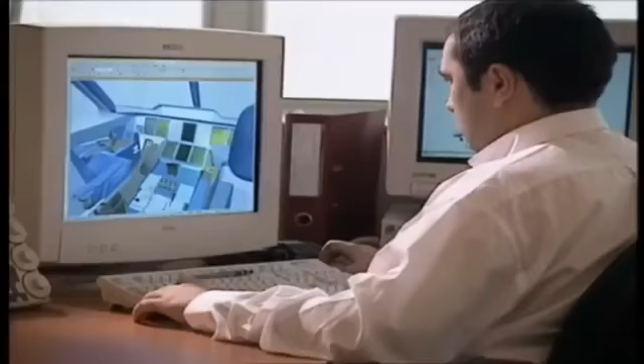It's a mega plane, bigger and heavier than any other passenger plane in the sky. It will hold more people than any commercial jet flying. Designers have spent billions. Now is the moment of truth. Will the world's biggest passenger airliner survive its maiden flight?

An early spring morning, clear skies and a light breeze over southwestern France. Crowding the fields that flank Toulouse International Airport, 40,000 spectators, backpackers, campers and journalists from around the world. All vying for the perfect spot to watch the maiden flight of the Airbus A380, the largest passenger plane ever built.

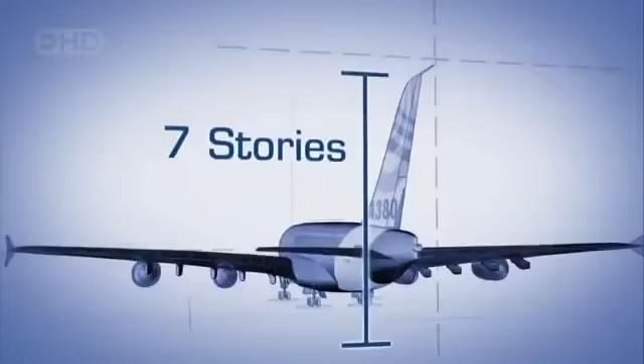It's 73 meters long, 7 stories tall at the tail, almost 80 meters from wingtip to wingtip, heavier, longer and taller than a 747, with 2 full levels of seating, enough to hold over 550 passengers.

Getting this monster off the drawing board required new, super lightweight materials, 4 powerful new mega-sized engines, massive new factories across Europe, and a computerized flight control system more sophisticated than any other in commercial aviation.

This moment is the biggest gamble that the company has ever taken. A $12 billion investment, the company's entire future, and the lives of future passengers all ride on the success of this historic test flight.

Alongside the runway, a hush settles over the crowd as the megaplane comes into view. Gradually, it gathers speed, accelerating to reach its takeoff velocity of 269 kilometers per hour. Then, as it nears the end of the runway, the moment of truth. The massive nose tilts skyward. A sliver of daylight appears beneath the rear wheels, and the Airbus A380 takes to the sky for the very first time. The engineers and technicians in the crowd breathe a collective sigh of relief. Their baby is flying.

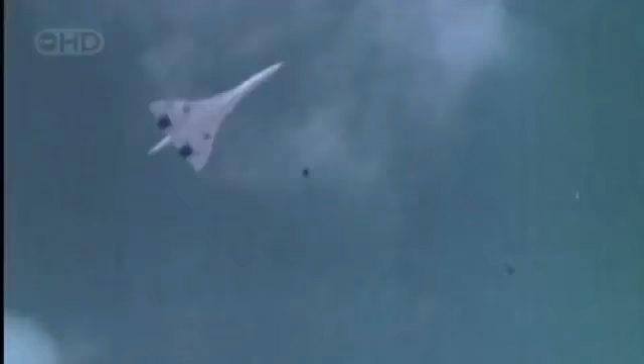The Concorde is here. That same year, Aerospatiale and British Aircraft Corporation, the precursor to Airbus, introduced the Concorde. While Boeing was bulking up, Europeans were getting small, but very fast. The Concorde traded capacity for speed. The plane carried only 128 passengers, but it could cruise at twice the speed of sound, cutting the trip from New York to London from almost 8 hours to just under 3.5. Both the 747 and the Concorde came to be the epitome of luxury in air travel.

These two differing visions came to symbolize a fierce rivalry between American and European aerospace giants. A rivalry that's only intensified with time, even as the business of air travel has changed dramatically. The Concorde, after years of financial difficulties and a devastating crash in Paris, has been grounded. And the 747 is now an aging workhorse, noted less for style and more for the sheer number of passengers it can pack between its wings. What changed to turn air travel from a luxury to the airborne bus ride that it is today?

Simple economics. In just a few short decades, the number of people traveling by air has tripled. Now, every day, hundreds of thousands of people pack into 70,000 flights, taking off and landing at more than 4,000 airports around the world. And those numbers are only going to get bigger, much bigger. Industry analysts predict that the number of air travelers could double again by the year 2020. That is, if anyone can figure out how to squeeze them into an already overcrowded system.

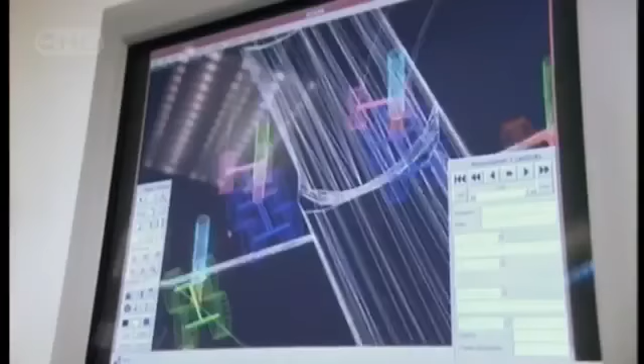The plane's sheer size, with 2 passenger decks, is large enough for both standard seating as well as more luxurious features, like a lounge, a high-end shop, 2 staircases, even a waterfall. It's a breathtaking dream. But no one knew if such a plane could be built. Some argued that such a craft would be far too heavy and expensive to be practical. But a tenacious and aptly named Airbus executive, Charles Champion, wouldn't take no for an answer.

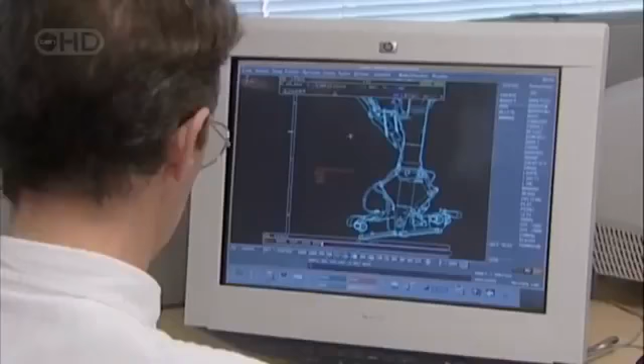He encouraged his design team to think outside the box. Yeah, well, there were lots of weird designs. Some looked at the double bubble. One of their first ideas, the double bubble, a double-wide fuselage. It looked promising, but computer analysis showed that it would be far too heavy and not sufficiently aerodynamic. So Champion sent his team back to the drawing board, and eventually they came up with this history-making concept.

A full-length, double-decker passenger cabin, with a third deck below for cargo. Space-wise, it's the equivalent of 2 complete wide-body cabins, one on top of the other. The new plan called for an aircraft only 2.5 meters longer than Boeing's 747. It was 15 meters wider and 5 meters taller.

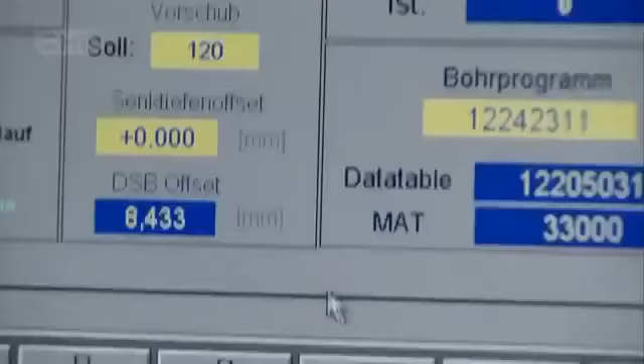But when they ran the design figures through the computer, they had a shock. The plane was far too heavy. And we came up with horrid figures, saying, my God, this is the weight of the aircraft, doesn't work. So what we did immediately at the launch of the program, or 2-3 months afterwards, we launched a very strong challenge on the weight. The team set out to bring the base weight of the aircraft below 277 tons.

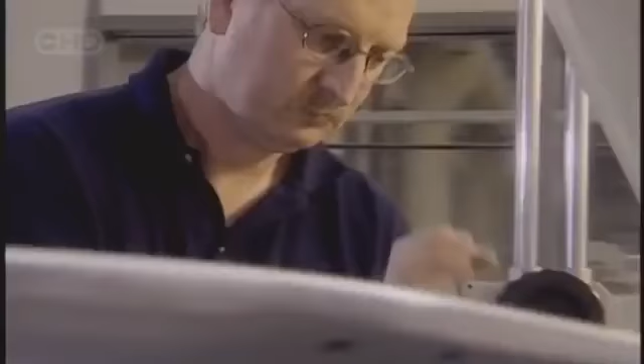That's only about 50% heavier than the 747. An ambitious goal for a plane designed to carry over 100 more passengers and their luggage halfway around the world. Unless Champion and his engineers could find the means to beat that target, the dream would die.

Airbus engineers were faced with a design challenge that called for a lightweight plane carrying over 550 passengers at a lower cost per seat, not to mention quieter and less polluting than anything in the air. The design team knew they would have to rethink everything. They needed lighter materials, more powerful engines, larger wings, even bigger and smarter factories. Every component would have to be scaled up from supersize to mega size.

But even while the engineers were still scratching their heads over the details, the Airbus sales force was already hard at work, seducing customers with visions of the future. They created a full-sized interior mock-up that promised passengers in coach some relief from the grind of travel, with seats an inch wider than in other planes, and overhead bins 10% larger.

Each plane can also feature a new interior illumination scheme to eliminate the upsetting effect created when flight attendants suddenly switch on overhead lights. The kinder, gentler system in the A380 mimics the gradual transition from day to night and back to daytime again. These and other innovations make the plane distinctive, but it's the promise of opulent luxury that really turns heads. To help build excitement, computer programmers constructed a virtual showroom where airlines can bring to life their wildest design fantasies.

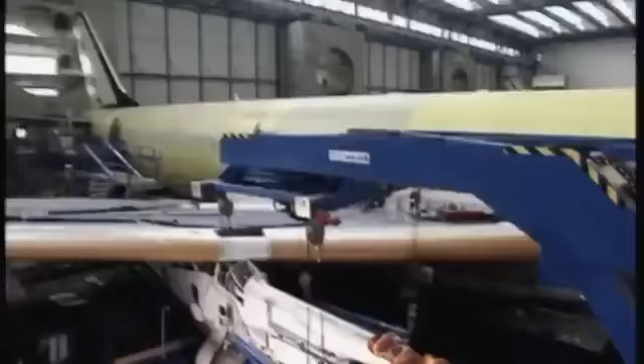Of course, no dream could take flight until engineers came up with a way to lift all that weight. In late 2000, builders finally settled on a design. For power, they would buy engines built by Rolls-Royce, capable of providing 30% more thrust than the engines used on the 747. Each massive power plant cost $15 million, as much as a ton of gold. Altogether, they account for almost 25% of the cost of the entire plane.

But if there's one thing this aircraft needs, it's thrust that won't quit. Each engine provides up to 80,000 pounds of force. Running at top speed, this mega guzzler sucks down a litre of gasoline every second. The A380 is designed for routine flights lasting 13 hours or more. That means when it's fully tanked for takeoff, the A380 carries a lot of fuel. 260,000 litres, 20% more than the load carried by the 747.

Just imagine what would happen if anything threatened the integrity of one of those fuel tanks, like a catastrophic engine failure that sends shards of metal tearing through them. That's the nightmare that haunts engineers at Rolls-Royce, and they're about to destroy an engine to make sure it never occurs.

These 24 titanium fan blades suck air into the maw of this A380 engine. Each blade is 1 meter in length and weighs 15 kilograms. Lightweight, but super strong. When the engine is roaring along at full throttle, the blades spin at almost 3,000 revolutions per minute. The centrifugal force at the tip of each blade is equivalent to the weight of a 110-ton locomotive. If one of these were to break off and escape into the engine, it could wreak unimaginable destruction to the plane.

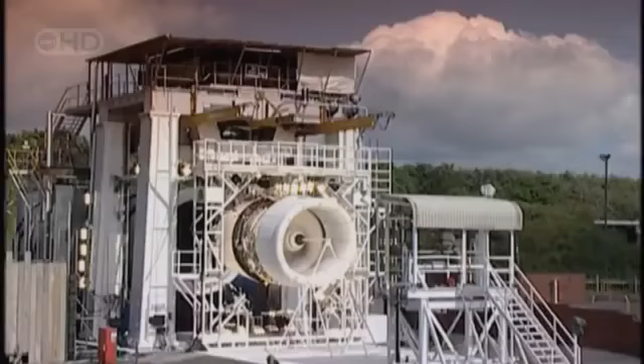That's why Rolls-Royce engineers are about to conduct an engine failure test. They're going to intentionally cause one of the fan blades to break off at full speed in order to prove that the engine enclosure can contain the damage without letting any metallic fragments escape. In the process, they will totally trash this $15 million engineering marvel, a small price to pay when the lives of over 550 people could be at stake.

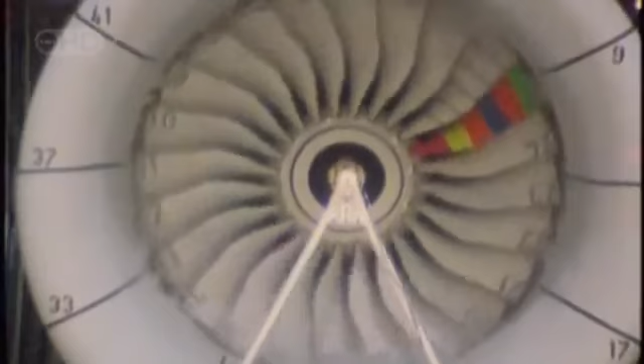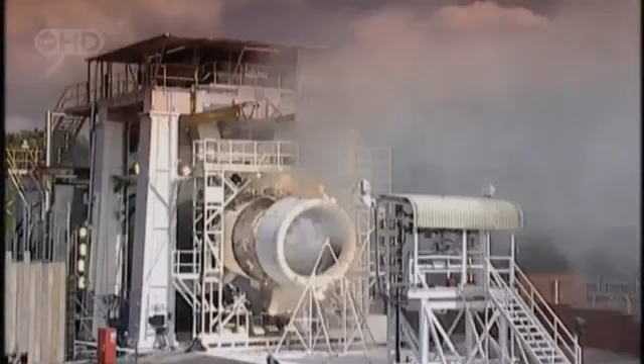A super slow-motion camera captures every moment in excruciating detail. The blades are striped to make visual measurement easier. When the fan is spinning at full speed, engineers send a signal to explosive bolts at the base of the multicolored test blade. Faster than even this camera can see, the knife-like piece of metal shears off and flies into the engine mechanism, wreaking havoc, but no fragments escape. The A380 engines are safe for flight, but there are many more pieces to the puzzle. Every other major component would have to be designed from the ground up.

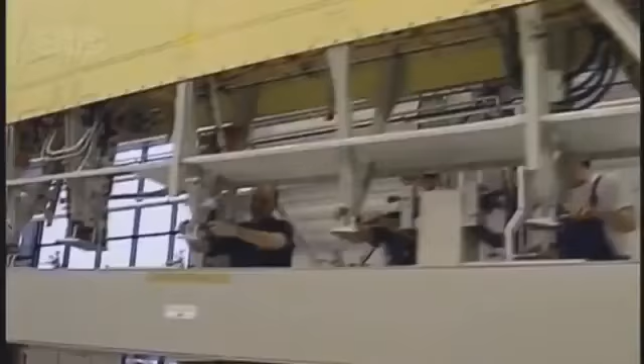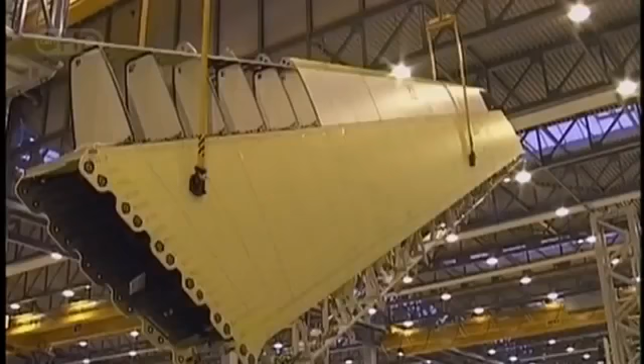Luckily, Airbus has already turned the world into a giant mega factory, with 1,500 suppliers and facilities used to build its existing planes, scattered over 30 countries, yet tightly linked by an advanced communication and transportation network. To assemble the hundreds of A380s the company hopes to sell in the coming decades, planners settled on 5 countries to build the major components. Wings in Wales, engines in England, the fuselage and vertical tail section in Germany, the horizontal tail section in Spain, and of course France, where all the pieces came together to assemble the finished plane.

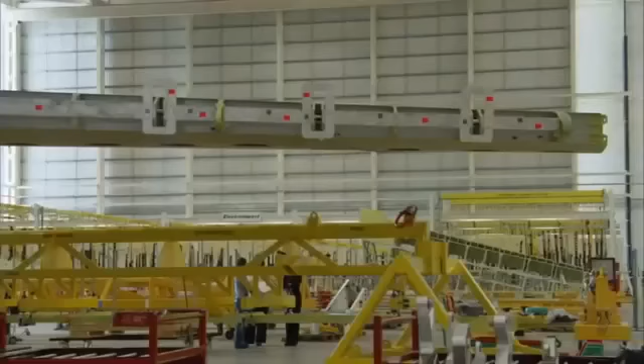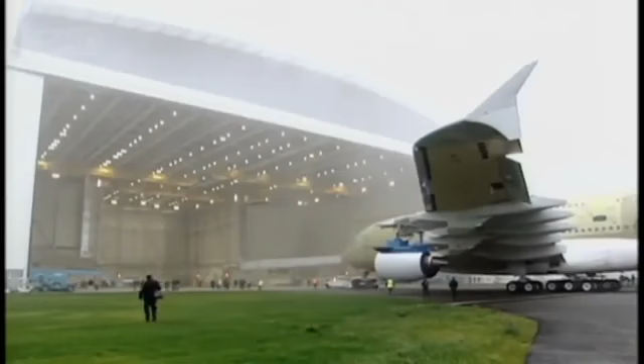The process begins in Wales, in 2 huge new wing factories, built to assemble the largest and most structurally complex commercial airplane wings ever designed. 32,000 components, shipped in from every continent except Antarctica. The wings on the A380 are true mechanical marvels. They provide flight control and enough lift to carry the fuselage, plus the 4 supercharged engines, each weighing nearly 6.5 tons. And with 260,000 litres of fuel loaded inside 10 interior locations, the wings are also flying fuel tanks. They're one of the most critical structural components in the entire aircraft.

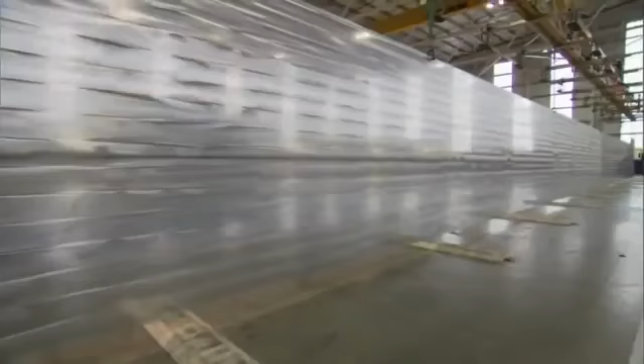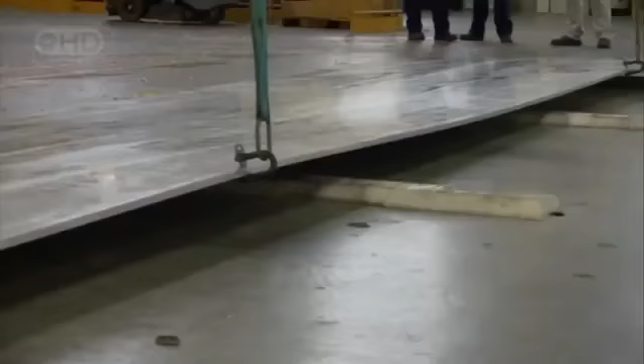The precision construction process begins with sheets of aluminium. Destined to be shaped into the 10 panels that cover each wing, each piece has its own shape and weight requirements. To whip one up, just follow 3 not-so-easy steps. Shave it, wrap it, then bake it. This 34-meter-long slab of aluminium weighs in at 5 tons. Way too heavy for the wing panel it's destined to become. In its final form, it will weigh close to 1 ton. So off it goes, to get the aerospace version of a tummy tuck. Overhead cranes use 32 powerful suction nozzles to lift and transport each aluminium slab.

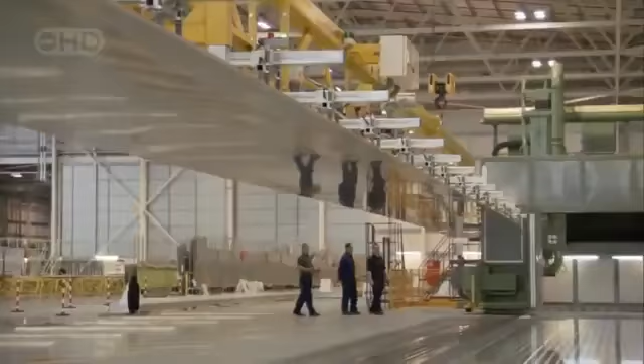Tim Fernifer carries the burden of responsibility. Using a remote-controlled steering device, Tim guides the 5-ton piece of metal across the factory floor, but he can't do it alone. His team must watch the motion of the wing panel throughout the ride. You've got to be particularly careful that I'm handling it, but I can't see down the other end, so I need another pair of eyes down the other end. It's just health and safety issues you have to watch, make sure everybody's out of the way when it's actually moving. It's a dicey ride across the factory floor before the huge sheet can settle safely into position.

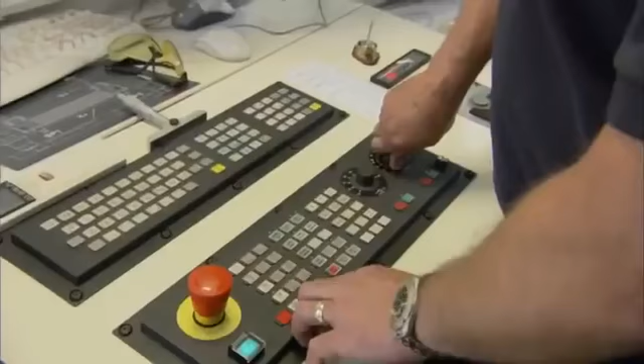A milling machine 40 meters long. Like an oversized cheese grater, the precision cutting head slowly cuts back and forth across the surface of the wing, painstakingly shaving the aluminium until the panel shape matches the 3D contour map stored in the machine's computer. The process takes up to 3 days. It eliminates 75% of the panel's weight while maintaining its strength.

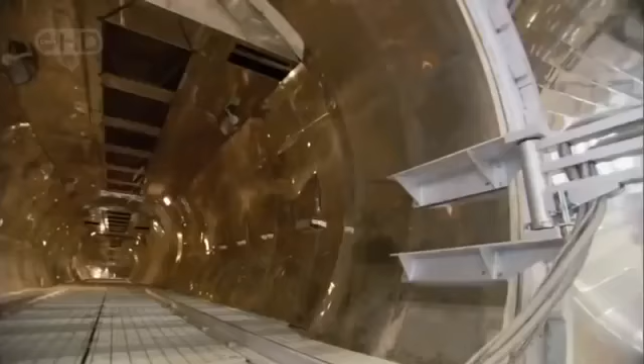Then it's ready for the oven, one of the world's largest pressurized heat chambers, 42 meters long, almost 6 meters wide. Technician John Massey has cooked plenty of wings for smaller Airbus planes, like the A320. It's a challenge to see it go from the size of the 320 to the size of the 380. It's a huge, huge jump. The A380 wings are 50% larger than A320 wings. That means a 50% greater chance of error in this critical process.

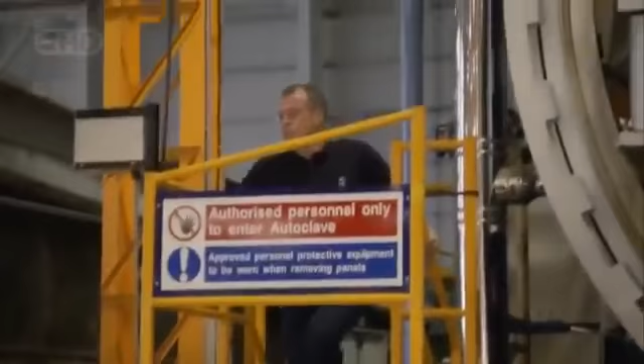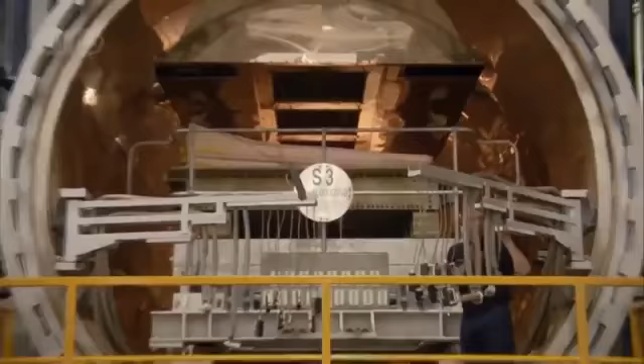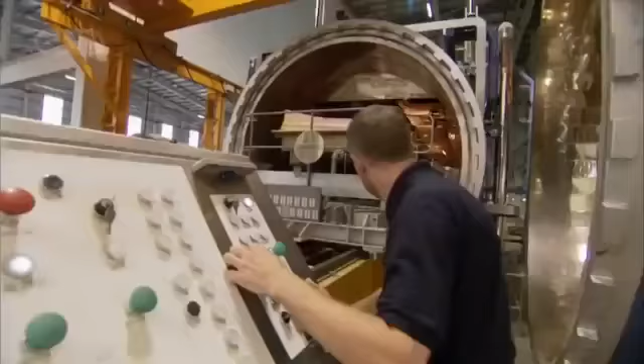Baking requires careful setup. First, Massey and others place the segment in a special metallic form. Then they vacuum seal the entire assembly with a massive piece of plastic shrink wrap to protect the metal from contamination. Inside, the heat must be uniform across the entire panel, 150 degrees centigrade, with no room for error. We try to avoid any changes in the vacuum or the temperature, so the temperature must remain constant right throughout the process. It must maintain within 3 degrees. Otherwise the run is invalidated. After 24 hours, the panel is ready.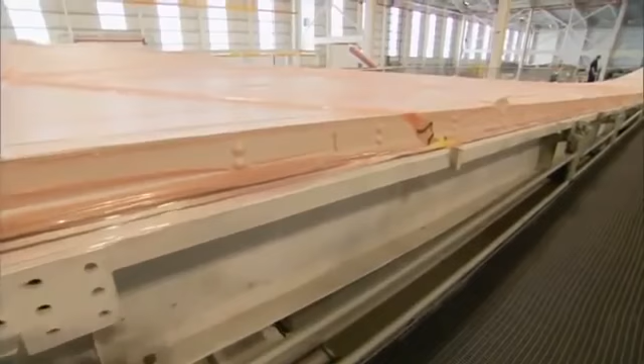Specially equipped vehicles rise up and move into place in front of the oven. All eyes are on the plastic protecting the wing panel. If it breaks, the aluminium wing piece is compromised. A disaster. The entire wing panel would be worthless. If the bag bursts, it means starting the job again from scratch. Anxiously, they scan the surface for any breach. At last, the wing is cool enough to touch. And good news, the bag appears to be intact.

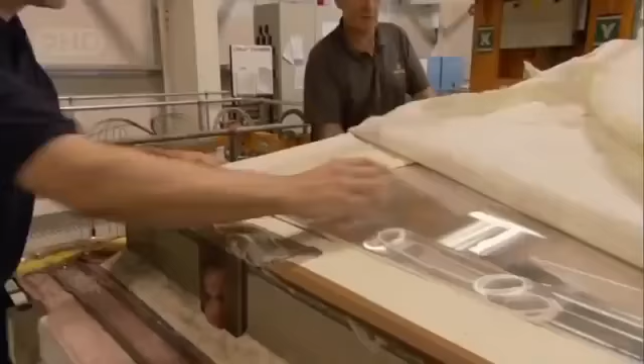Finally, the wing segment arrives in its docking bay. Here, the technicians first remove the plastic and cloth wrap. Now begins the tedious search for flaws. John's boss, Gareth Williams, arrives to inspect the piece. He retrieves small metal rods that were baked onto the top of the wing panel. Each of these cylinders tells an important story about future safety. These are test pieces which are made of the same material as the wing panel, and we use them to confirm that the heat process that this part's just gone through is correct and it's to the right specification. When this testing phase is complete, Gareth and John get the okay to move the wing to its next destination.

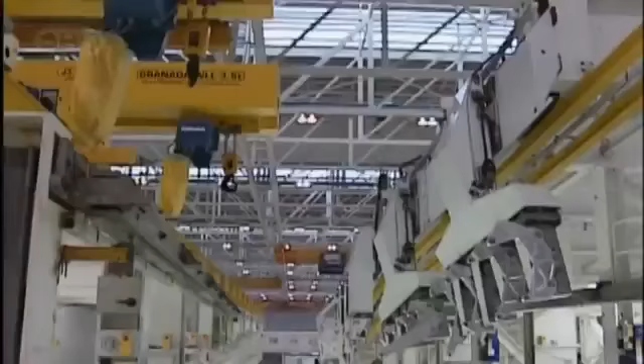The nearby wing assembly plant, an enormous brand new factory located just up the road. It's one of Britain's largest industrial buildings built in this century. It's nearly 85,000 square meters in area, equal to 12 full-size football pitches. This is where the builders attach the aluminium skin panels to the wing skeleton. George Lee guides his team through the tricky assembly process. Today they're preparing to lift and place one of the largest of the 10 aluminium panels, 34 meters long and weighing in at more than 1 ton.

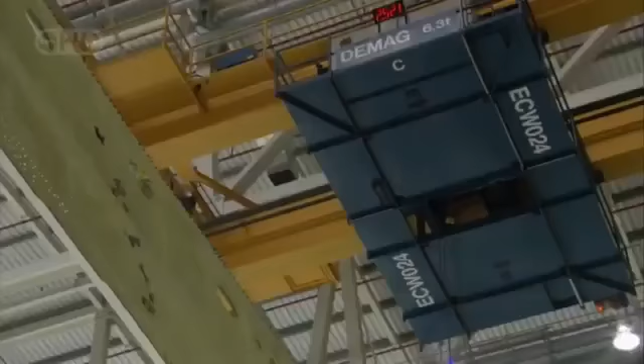Size is a great challenge because everything requires some form of overhead lifting. Nothing can be lifted manually, so virtually everything requires overhead craneage movement, and therefore the management of the craneage system is very, very important. The panel hangs like a huge guillotine, suspended over the factory floor. But that's not all that's hanging over the assembly team's head.

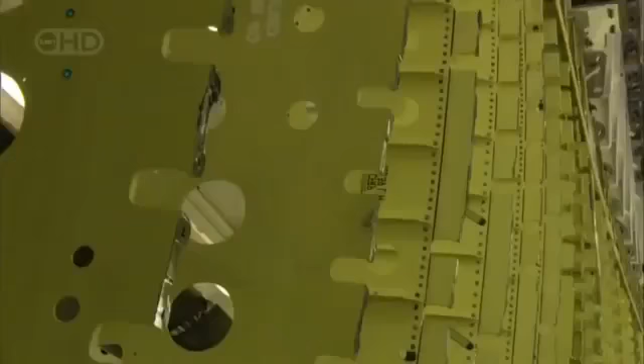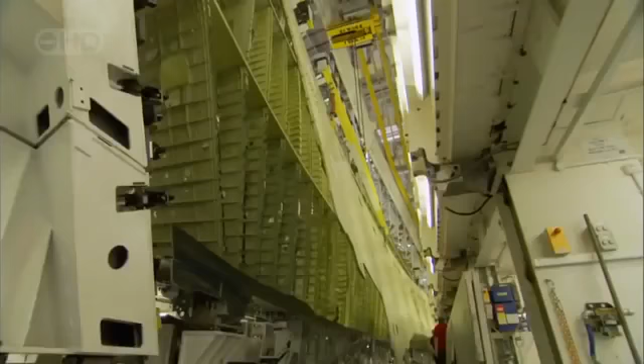Time is running out. Along the edges of the partially constructed wing, builders have applied a sealant that will help to ensure the integrity of the fuel tanks. The sealant dries quickly within hours. The team must fit the wing panel into place before the sealant dries, or the wing could be defective. This time they're cutting it close. The only concern I've got is the time factor. If they don't succeed, the team will have to scour the sealant off the aluminium surface and start the whole process again.

Finally, the panel settles into place. 1 down, 9 to go. It can be stressful, yeah, it can be stressful. At certain times, it's an enjoyable job, because when it actually all works and goes together, it's quite enjoyable. You've made it an achievement.

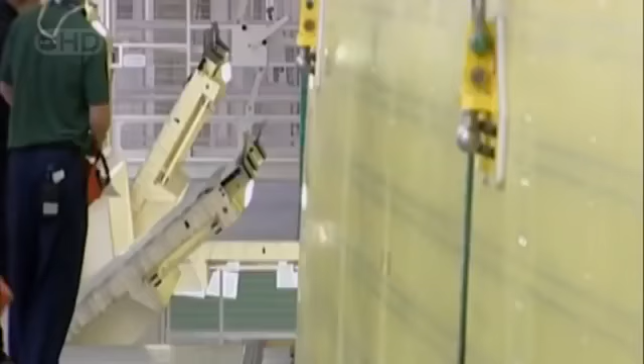Now it's time to glue and bolt together the pieces, like building the world's biggest model airplane wing. This part of the process remains a carefully guarded trade secret. The company wants our cameras off. No cameras.

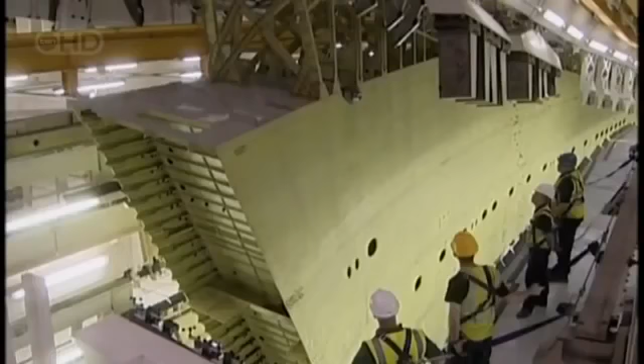The secret assembly process inside the jig will take nearly 4 weeks to complete, but it takes more than a wing to make a plane. All across Europe, more factories are coming online, pumping out body parts of this giant Franken plane. But not everyone is happy to see this kind of progress. Some locals in Germany are up in arms over Airbus's ambitious plans.

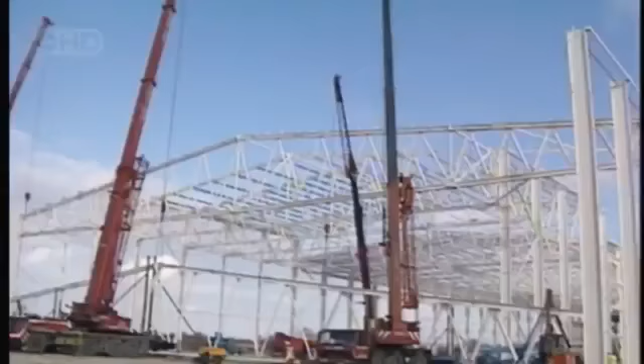This is the newest Airbus factory in Hamburg, a megastructure big enough to house 4 A380s side by side. Airbus has been building airplane fuselages in Germany for more than 30 years. But with the announcement of the A380, the company needed to massively expand the site and send finished planes here to get tricked out on the inside and painted on the outside.

No matter what the customer wants their plane to be, a 550-seat cattle car, a high-class hotel in the sky, or even a heavy-duty freighter, this is where the seats, the carpets, the stairs, and yes, even the bar and the waterfall will all be installed. The expansion plan called for 3 new buildings and a longer runway to accommodate the massive plane, but there was a problem.

Airbus's main factory here sits alongside Germany's Elbe River, smack in the middle of Europe's largest tidal wetlands. It's a very special area because we have there the influence of water from the country and tidal water from the sea. So we have a mixture of sweet water and salt water. This fragile ecosystem is home to 70 species of migratory birds. Now 71 if you count the Airbus A380.

Airbus wanted to fill in 140 hectares of pristine wetland, and local activists cried foul. A pitched battle in the courts and demonstrations in the streets delayed construction of the factories for over 2 years. But eventually, local and national politicians who wanted to bring business to the community intervened.

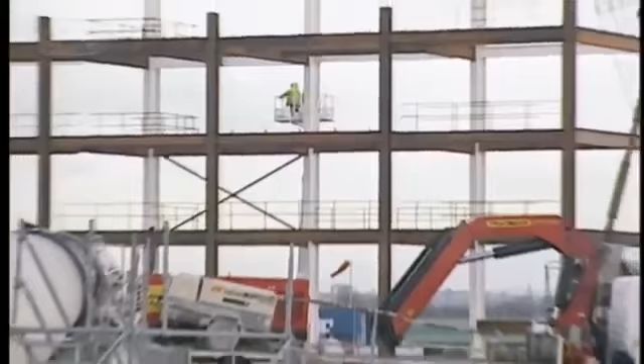The factories went up. One got busy building fuselage segments, but the other 2 stand nearly empty. More lawsuits still block the Hamburg facility from taking delivery of all of the planes it's meant to finish. Unless the company wins in court, it may have spent a few $100 million building a factory of little use.

The problem lies with the runway. Airbus needs a longer runway to accommodate a heavy-duty cargo version of the A380. We need the runway extension in Hamburg for the pilot to test the performance of the aircraft. And he only can test this when he has an aircraft with a weight which is approximately the weight you normally have in cruise altitude and a normal scheduled flight.

That plan to lengthen Hamburg's existing runway has met with considerable resistance from locals. Their concern: extending the runway will bring the tarmac to within just 450 meters of village orchards, and uncomfortably close to a Lutheran church that houses a priceless organ built in 1688. A delicate instrument that could be damaged by ground vibrations and wake vortices, turbulent bands of air similar to miniature tornadoes.

We have very precise information on the generation of these wake vortices, so small, let's say, tornadoes, wind generated by every aircraft, more or less, which can affect buildings and also persons close to the runway or close to the flight path. And we have predictions that we should expect occasionally winds up to Beaufort 12, which is about 130 kilometers per hour in the core, and these tornadoes will hit the church tower and the roof construction.

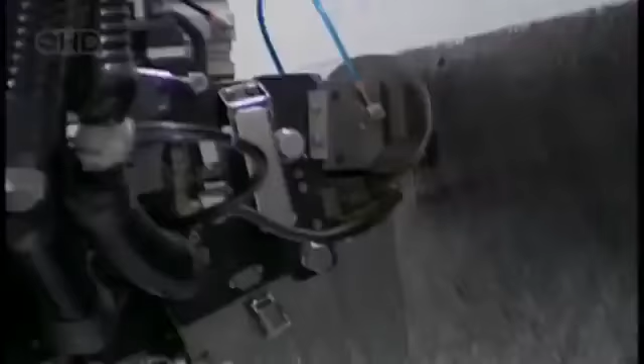It's called carbon fiber reinforced plastic, and it's made out of the same stuff that gives diamonds their incredible strength. Carbon fiber is 6 times stiffer than steel and much lighter. It's the only option if builders are going to keep the weight of the plane below the target of 277 tons.

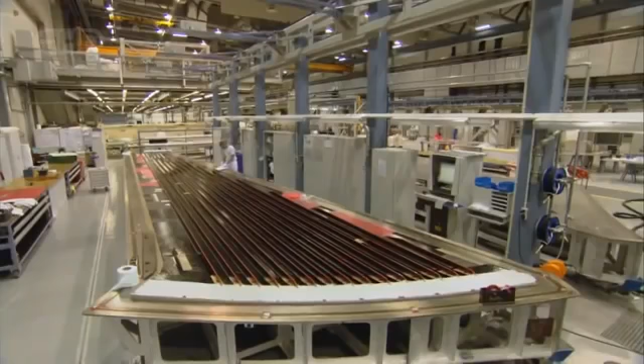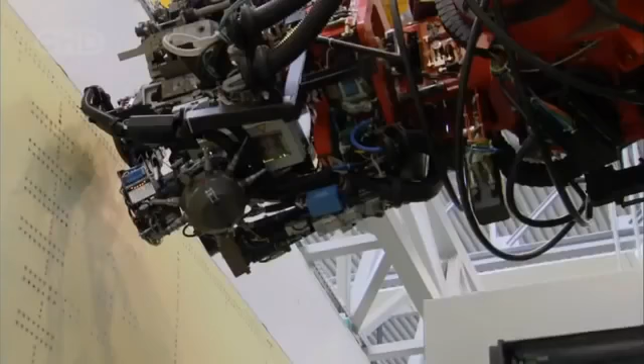Unlike forged metal, carbon-reinforced plastic parts are actually woven, like cloth. Fabricating machines spin out tail panels by combining super-strong carbon fibers with plastic resin to create almost any shape the designers can imagine. After baking, strengthening, painting and drying, technicians join the lightweight panels to the tail skeleton with the help of this computer-controlled riveting robot.

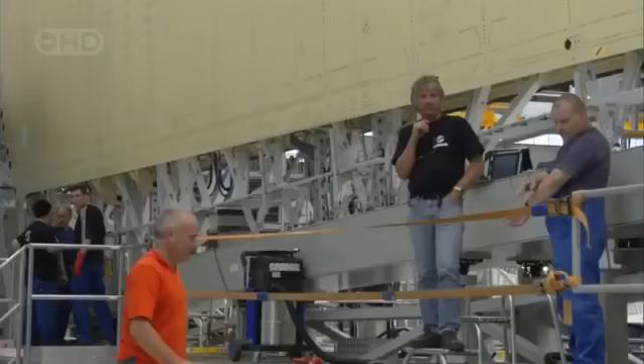Working around the clock for a week, the robot makes 10,000 critical connections with tolerances no human can match. The integrity of the tail fin is crucial to the safety of passengers. Airbus engineers know only too well what can happen if a tail structure fails.

It was the second deadliest crash in US history, and investigators made a disturbing discovery. It had been caused when the tail fin and rudder, made partly out of composite materials, sheared off as the plane accelerated. Investigators concluded that cockpit errors, not a failure of the carbon composite material, most likely caused the crash. And builders have applied the lessons of that catastrophe to the tail fin of the A380.

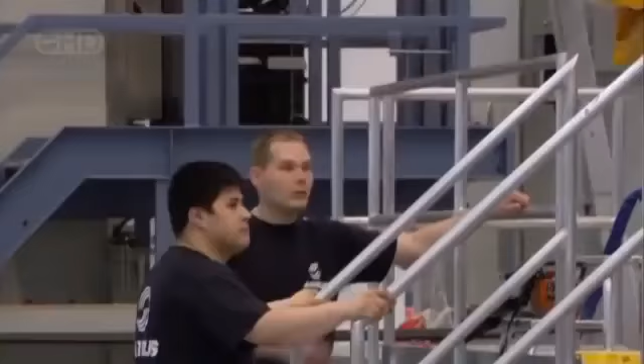But today, something's gone wrong on the factory floor. A lightning strike zapped the power supply, and now the precision riveting robot is dead in the water. We had a storm, a lightning strike. The PC failed and the hard disk was completely gone. Mother Nature has thrown a wrench into the works, causing a total crash of the system.

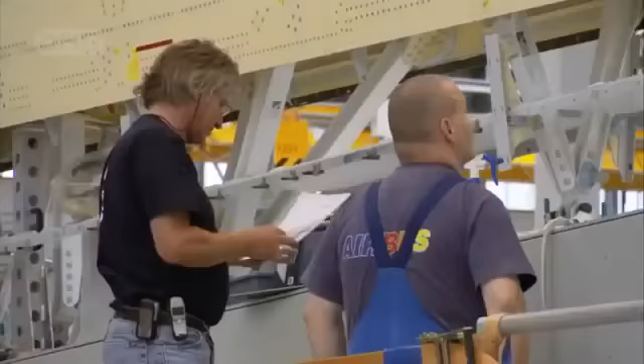It is electricity. Sometimes it happens. Normally we are protected, but it can just happen. Critical hours pass as Kai Baumgartner and his colleagues struggle to get the robot back online. If they can't fix the computer, they can't make the deadline set for finishing this tail fin. Kai and his team must find the problem, and quickly.

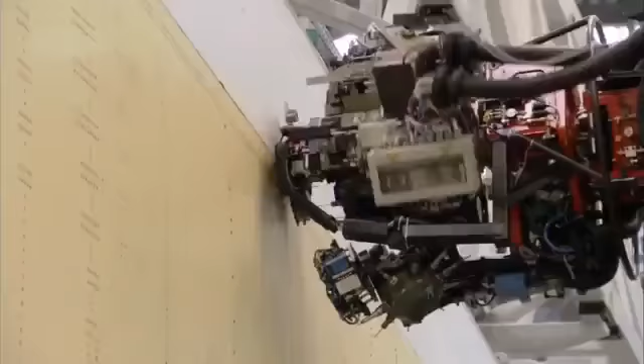By the end of the shift, the sound of riveting echoes through the factory once again. Kai is finally back at work, personally verifying that every one of the 10,000 connections is perfect. A tiny camera positioned on the end of the riveting machine allows Kai to carefully examine each rivet, making sure to catch any abnormalities in the process.

I make sure that the drill doesn't get stuck or any mistakes happen. I have my different systems here. It can happen that something is stuck or that an error occurs. It's a repetitive process, but Kai must remain vigilant to safeguard the lives of future passengers.

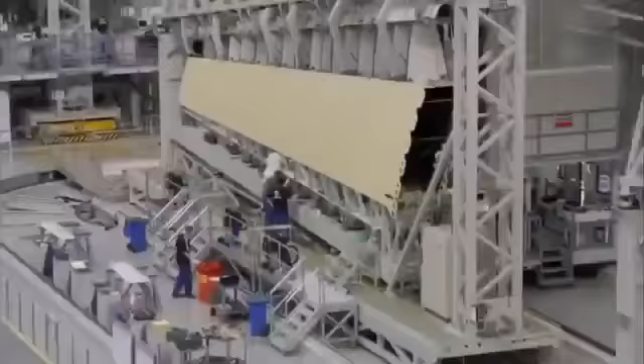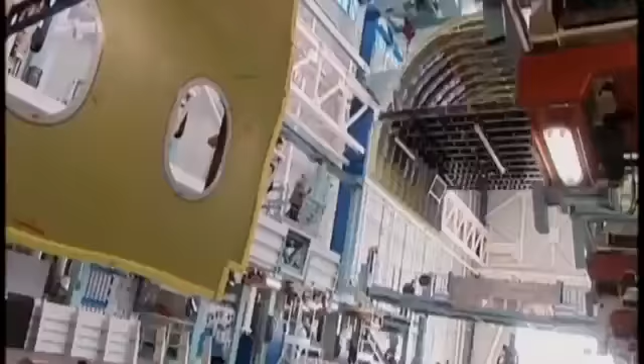Around the world, manufacturers and suppliers are putting the finishing touches on the components of the A380. But putting all the pieces together will be a logistical nightmare. Airbus's existing transport system, the custom-built mega freighter called the Beluga, is too small to haul the A380 components to the assembly factory in Toulouse, France. So builders came up with a risky plan to haul millions of dollars of critical components by water and land.

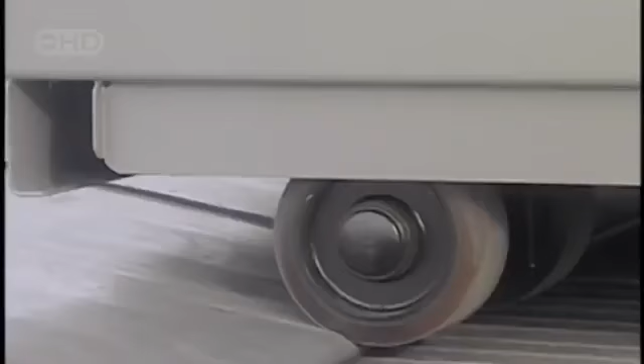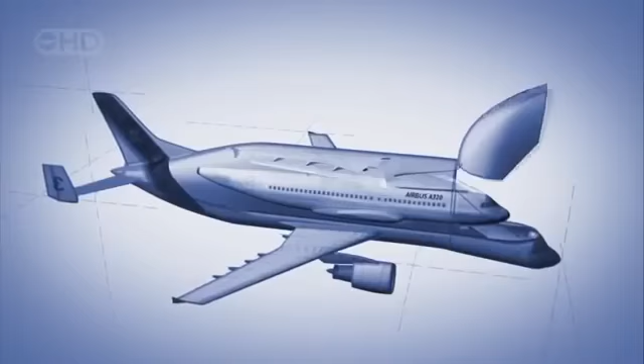Airbus had a problem. They needed to move pieces for the largest passenger plane in the world from factories all over Europe to their final assembly plant in Toulouse, France. For smaller planes, they could use the Beluga, Airbus's distinctive custom-built transport plane. The Beluga's cargo hold measures 7 meters high, 7 meters wide, and 38 meters long. Big enough to swallow the fuselage, wings, and tail sections of Airbus passenger planes like the 150-seat A320.

But when Airbus decided to build the massive A380, the sheer size of the parts overwhelmed even the Beluga. The Beluga is far too small to carry the A380's enormous double-decker fuselage or its record-breaking wings. So to get their parts to the assembly plants, the company now had to move them by sea and over land, instead of a 2-hour ride in the belly of the Beluga. Parts for the A380 joined a days-long parade of specially outfitted ocean ships, river barges, and trucks.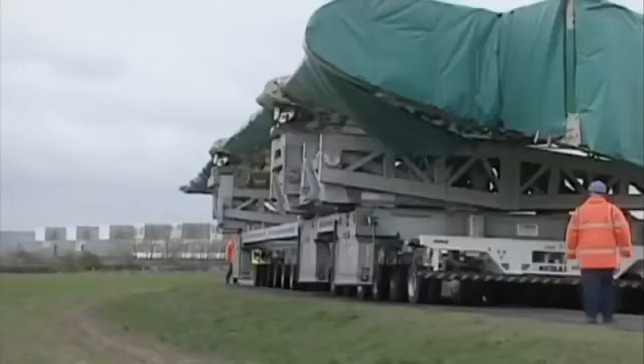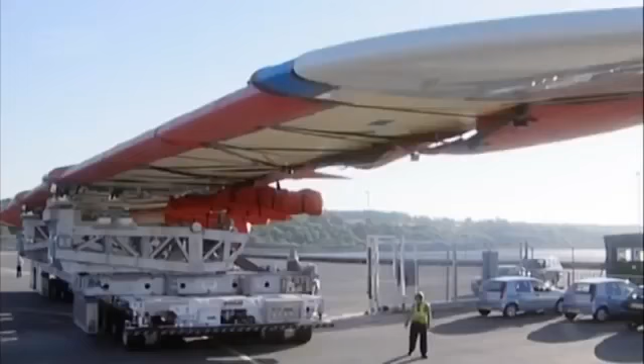Keeping this massive system on schedule is the job of Surface Transport Coordinator Philippe Nedelec, who has to keep it all moving fast. I like to say that I am a kind of conductor. I have to impose the tempo to everybody. Wings and fuselage arrive by sea in the port city of Pauillac in Bordeaux. From there, it's 96 kilometers by barge down the Garonne River.

It's a tricky bit of navigation to clear the historic Pont de Pierre Bridge, a prized landmark built by Napoleon almost 200 years ago. We have to cross a very old bridge. And at the beginning, the Bordeaux people were very afraid. What these Airbus people are going to do with our nice bridge. To maneuver beneath the Pont de Pierre, Philippe and his team keep careful track of the tides and the weather. If they don't time their trip just right, if the water is too high or the current's too strong, they could collide with the bridge, destroying precious cargo and damaging a priceless piece of history as well.

But waiting for the perfect moment isn't always an option. Suppose we miss a call for weather condition or some other things, then the boat can miss a tide, so we can miss 6 hours. And this 6 hours you can miss 1 week, because we cannot start the convoy, the road convoy, every day. It's not so easy. We cannot start when you want. Every pass under the bridge is a potential disaster. This time, they make it through, but just barely.

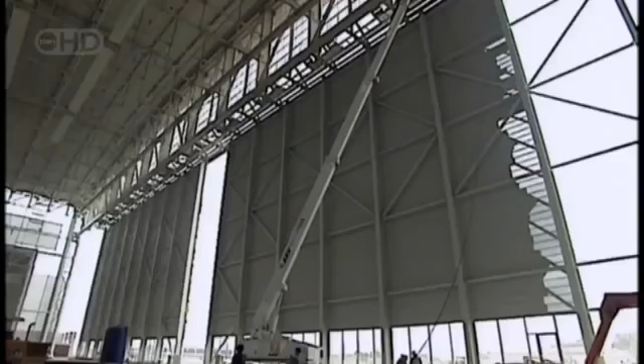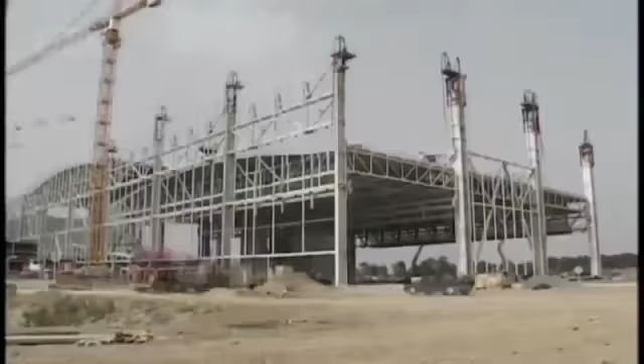At last, the convoy arrives at its destination, the final assembly line, the nerve center of the entire operation. The final assembly line sits on the edge of Toulouse's Blagnac Airport. As with all A380 factories, this one is huge. 500 meters long by 250 meters wide and 15 stories tall. 32,000 tons of steel, enough to build 3 Eiffel Towers. It's in here that the massive plane finally begins to take shape, with the help of a gargantuan assembly structure known as a jig. According to Julien Pouillou, there's nothing else like it in the world. We're standing in front of the biggest jig that is used in the world to assemble an aircraft. This is the Station 40.

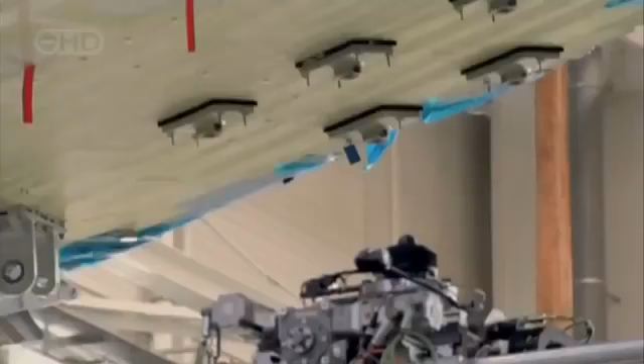Station 40 is where the fuselage, wings and tail all come together. The one-of-a-kind jig stands 5 stories tall, weighs 1,200 tons, and comes equipped with 4 elevators to carry workers to their stations. This is where theory becomes reality, as pieces made all over the world finally come together. If there's been any error, if the pieces don't measure up to spec, or if the joints don't come together just right, within millimeters, the huge passenger craft won't be fit for flying. The lives of future passengers depend on the steady hands of these craftspeople and engineers, working inside the mighty Station 40.

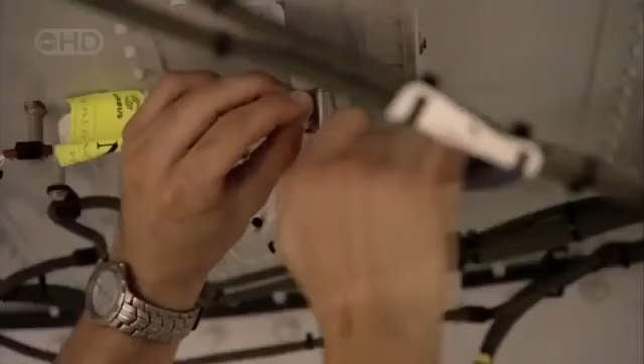The challenge is for us to assemble those pieces together at the same time, because we have a lot of workers working in the same area at the same time, and they have to do all sorts of completely different tasks. One has to take care of the wings and one has to take care of the fuselage, and so they are not doing the same job, but they have to do it together. Work on this plane now proceeds at an intense pace. It'll take 4 weeks to complete the assembly.

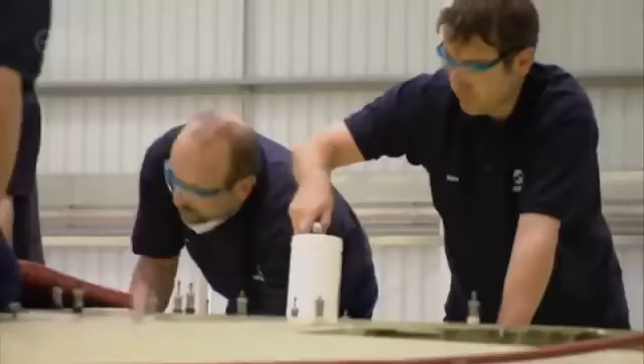Once the plane has been released from Station 40, it moves through a pair of 100-meter wide sliding doors and makes its way to the systems hall. Inside this gigantic space, 3 A380s can sit side by side comfortably, while technicians swarm over the superstructure, testing the electrical, hydraulic and plumbing systems that'll bring the dormant aircraft to life.

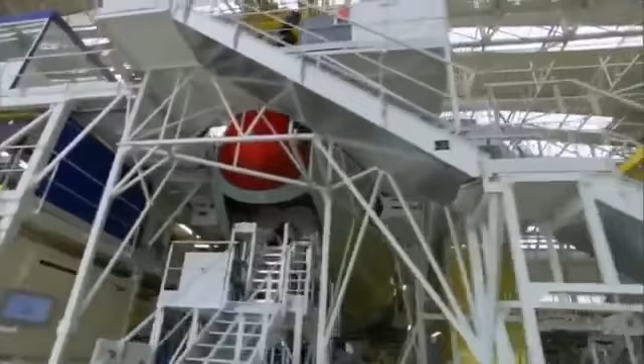Building just one A380 is a massive job, but for Airbus to survive, they're going to have to speed up production to a breakneck pace. Eventually, the Station 40 team will have to crank out a defect-free plane every week. But before that can happen, the plane must be proven airworthy. Now all eyes are on the skies over southern France, as the gathered crowd wonders, will the A380 survive its maiden flight?

At Blagnac Airport in Toulouse, 40,000 people anxiously scan the skies, searching for some sign of the A380. All flights in and out of the airport are put on hold. The skies over Toulouse are eerily quiet. Nearly 4 hours have passed since takeoff. If all goes as planned, the huge airliner should swing into view at any moment. But if there's a problem, the flight crew will quickly discover how well their training has prepared them for disaster.

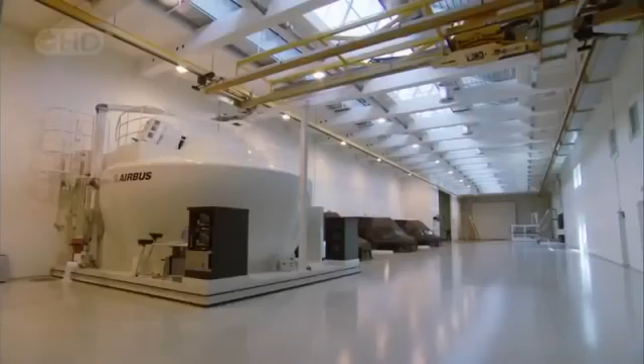Much of that training took place using powerful computers, programmed to mimic the behavior of the A380. That's the theory anyway. In a simulator like this one, with a computational engine 500 times more powerful than a home video game console, photorealistic visuals help pilots to get a feel for the plane. Despite the A380's unprecedented size, Airbus engineers have tried to make it fly like any other airliner. 100 knots. The task of testing the verisimilitude of the simulator experience rests on the shoulders of pilot Claude Lelaie.

I would say that it's exactly as a conventional aircraft. And it's quite amazing because this aircraft is so big and so heavy. This surprised most people, and especially pilots. One of the most important functions of simulators is to give pilots the chance to flirt with disaster. Very simple, and one engine is shut off. This is the engine number 4, and look what is happening. The aircraft is just moving slowly on the right side.

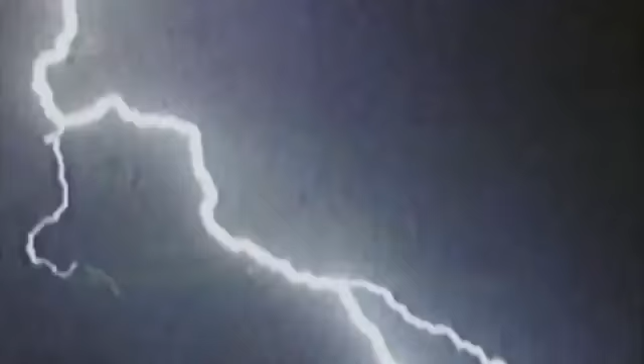It would take a lot more than an engine failure to knock this monster out of the sky. But test engineers are nothing if not imaginative, and they've loaded their simulators with more than 400 different catastrophe scenarios. Everything from a fire in the cargo hold to a devastating lightning strike. The exercises are useful, but no computer can simulate the awesome responsibility of shepherding 555 passengers through the stratosphere. The challenge is to fly with many passengers. I think this is the greatest challenge, yes.

Outside, all eyes are on the sky. The wait is excruciating. Then, a glint of reflected light. At last, the mega plane sails into view. Eager reporters and photographers race to the edge of the tarmac to record this historic moment. A showy flyby excites the crowd. Makes a steep turn, lines up with the runway, begins final descent. Then, at long last, touchdown.

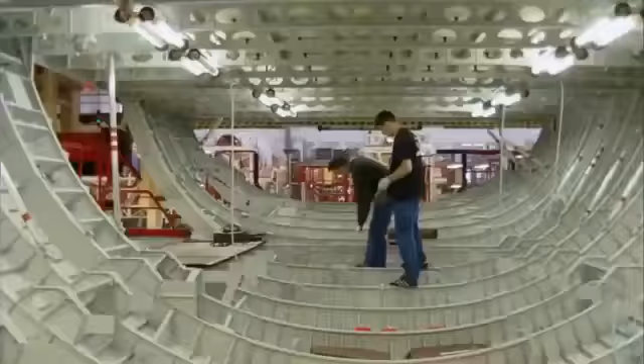They've proven that the plane can fly, but that may have been the easy part. At the time of the test flight, Airbus had 154 orders and still needed 96 more just to break even. To fill those orders, they must dramatically increase the speed of production and convince the world's airlines to pay nearly $300 million for each plane. But even while potential customers were lining up to drool over decor, and the engineering team was still basking in the afterglow of the successful first flight, Airbus surprised the industry when it unexpectedly announced a 6-month delay in the delivery of the first aircraft.

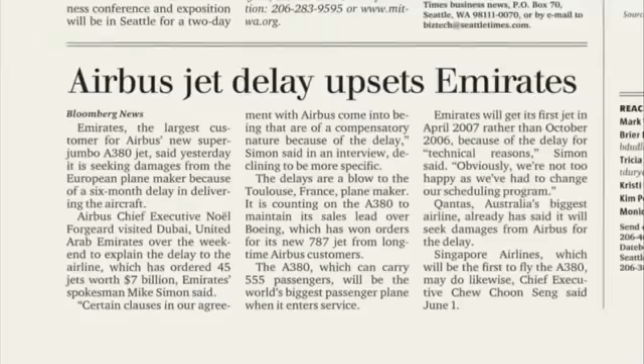Early customers who took the risk and put down deposits before the first plane had ever been built are not happy. Some analysts believe the plane is still heavier than Airbus promised, but Airbus insists that the delay is merely routine. The real achievement will be when the customer says, "Great, this is what I expected, I love it, give me more." If the last 40 years in the history of aviation is any guide, and more people fly further and more often, year after year, then Charles Champion's daring bet may well pay off, and the A380 just might become the flagship of commercial aviation well into the 21st century.